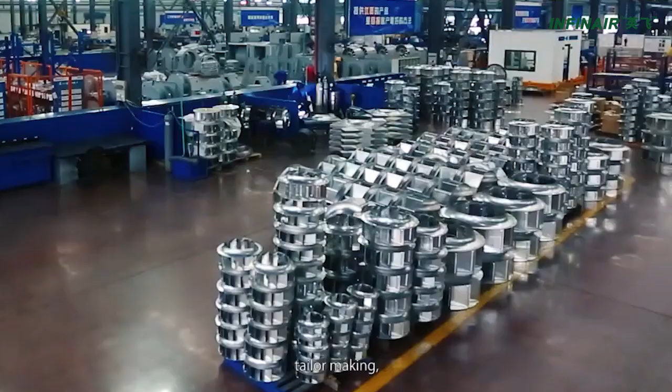Welcome to INFINAIR, integrated with R&D, tailor-making, manufacturing, and international serviceability. INFINAIR provides you complete, high-quality ventilation and industrial process air solutions.

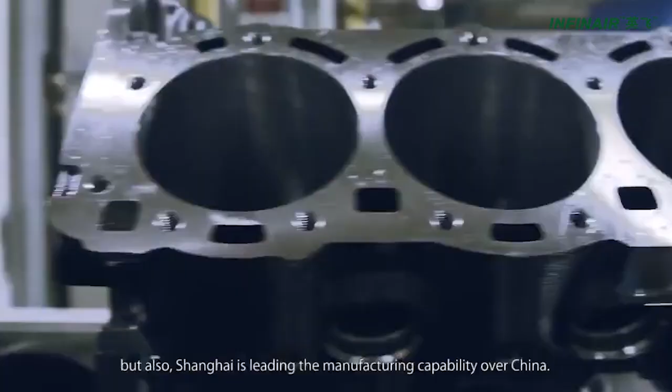Not only an international finance center and a business hub, Shanghai is also leading the manufacturing capability over China. Please follow us to our 33,000 square meter manufacturing center, right here in this dynamic and amazing global city.

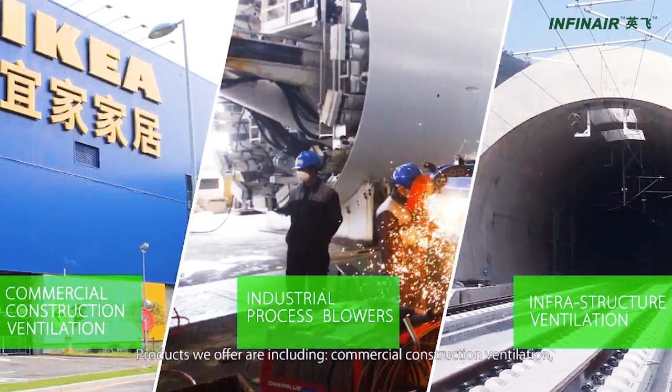Since 2003, INFINAIR started in a small workshop in Jiading, Shanghai. Now the modern R&D and manufacturing center is busy servicing customers from all over the world. But the dream of INFINAIR—extraordinary experience of customers and happy life of family members—has never changed.

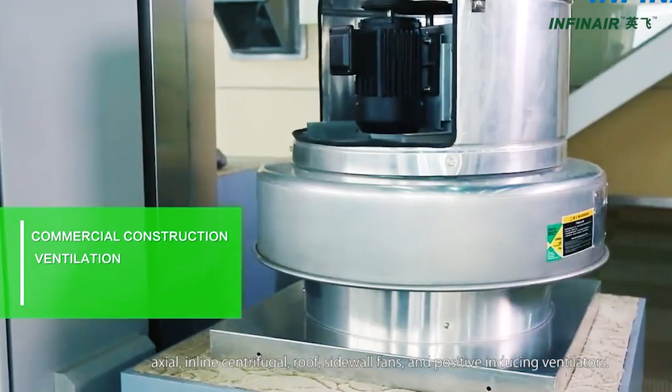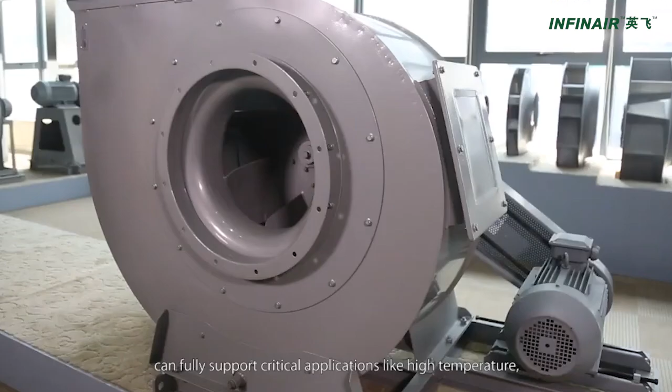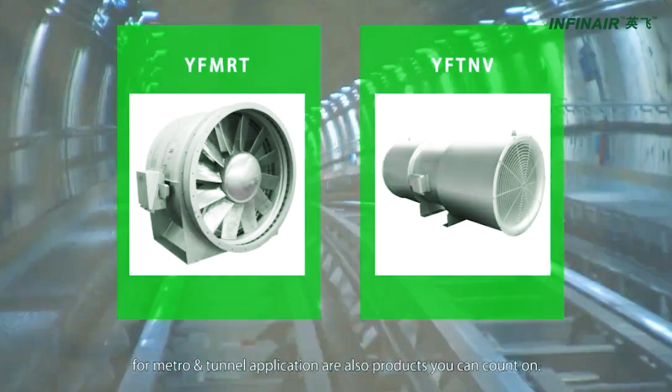Products we offer include commercial construction ventilation, industrial process blowers, and infrastructure ventilation. The commercial construction fans include axial, inline centrifugal, roof, sidewall fans, and positive inducing ventilators. The industrial process blowers we offer can fully support critical applications like high temperature, high pressure, explosive, and corrosive conditions. Reliable and economic ventilation solutions for metro and tunnel applications are also products you can count on.

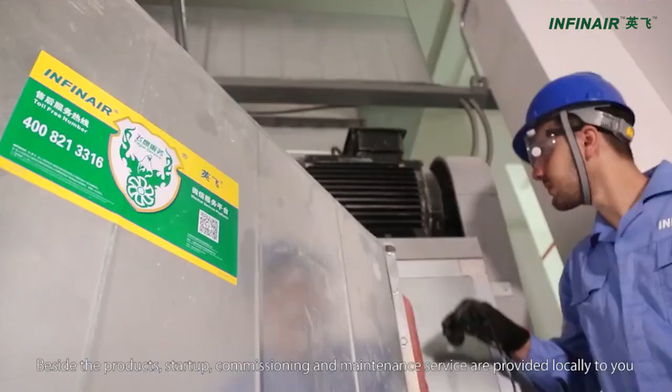Beside the products, startup, commissioning, and maintenance service are provided locally to you through our international partners in your country. We call it Eagle Service, which means right to the point, quickly.

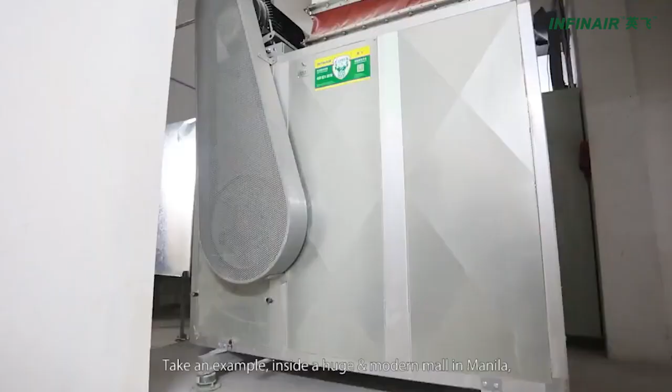INFINAIR Control Solution provides fan control cabinet design, manufacturing, and integration of communication between the BA system and fans. For example, inside a huge modern mall in Manila, INFINAIR provided underground car park ventilation layout design, all positive inducing ventilators, and all related control cabinets. The system automatically controls CO contamination across the total 6 floors of the car park region.

Tailor-making is also something meaningful. R&D ability is the core of product reliability. The 50 engineers on our R&D team have prepared more than 30 wheel platforms. This means we can quickly tailor-make designs for you without costing too much.

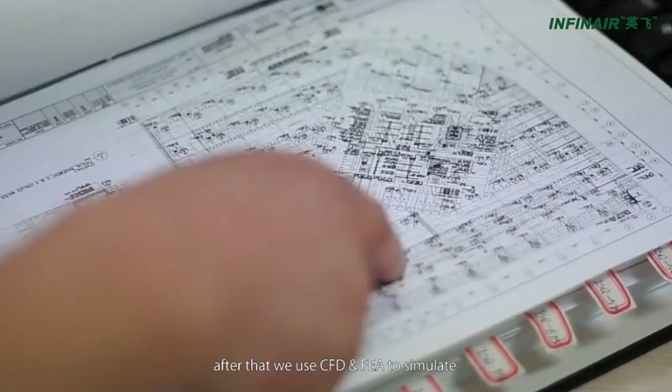The secret of how we achieve this is we choose one platform out of many readily available ones. After that, we use CFD and FEA to simulate until we find the performance you require. Maybe we need to modify blade height, blade numbers, or blade angle. Once it's done, we test the sample in the INFINAIR lab to verify everything is okay. The offer is ready.

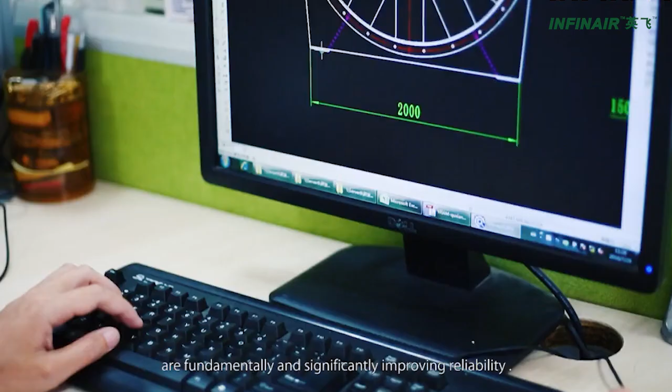Our CFD, FEA, and CAD technology fundamentally and significantly improve reliability. As an engineer, I'm very proud that our products are widely certified. Now I'm working on applying more and more international certifications, which we believe are essential for you.

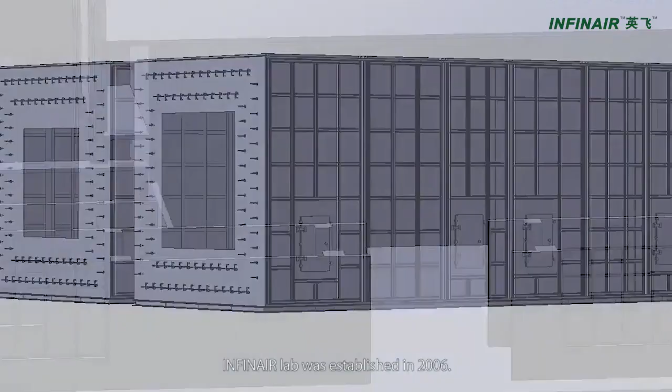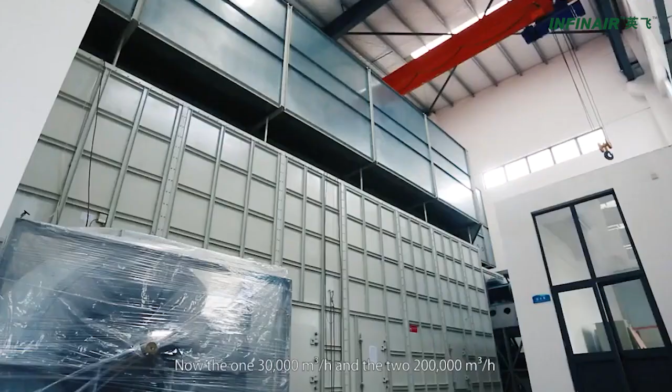INFINAIR Lab was established in 2006. Then in 2013, we reinvested over $2 million to renovate it. Now the one 30,000 cubic meters per hour and the two 200,000 cubic meters per hour super large-scale air chambers make the lab industrial-leading and world-class.

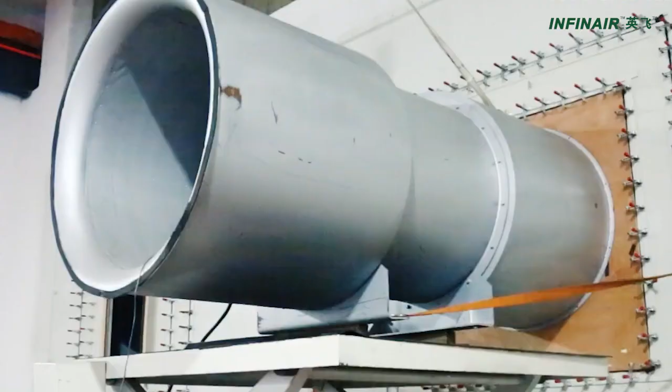INFINAIR Lab is the first lab in mainland China accredited by AMCA, and it is also listed as a nationally accredited testing laboratory by CNAS, according to ISO standard 17025 by Chinese authorities.

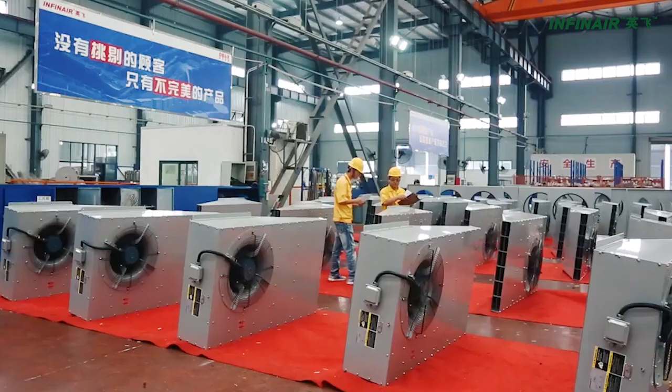Our product value proposition is reliable, convenient, and novel. Reliability is always our first priority. 5S, lean production, APQP methods, and Six Sigma systems—we practice these every day.

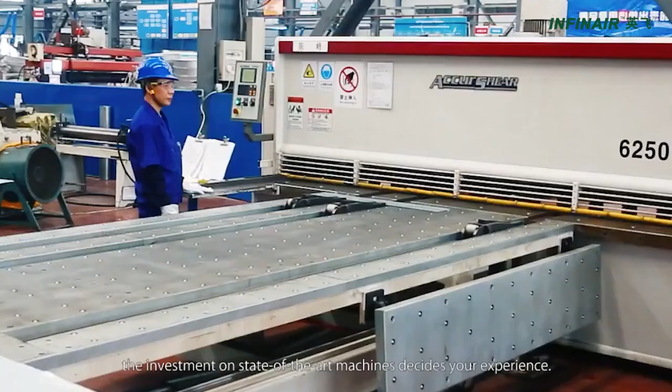Laser cutting, plasma cutting, robot welding, CNC lathe, CNC bending, CNC shearing—the investment in state-of-the-art machines decides your experience. Beside those, thousands of molds ensure the wheel platforms are right there to satisfy your needs. Such a large scale of product availability means convenient and quick solutions.

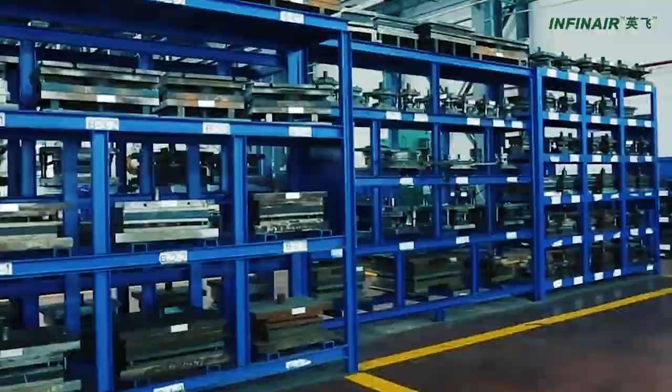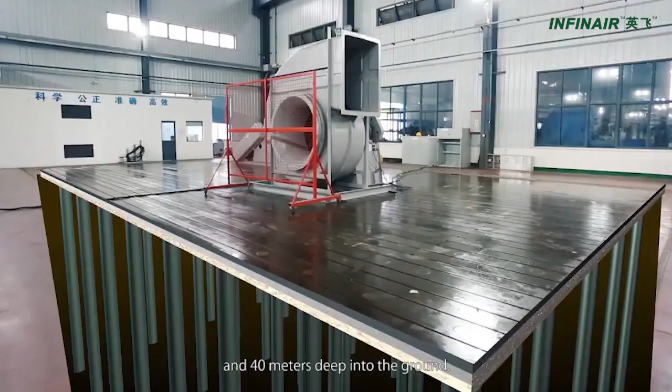Our vibration test bench is 18 meters long, 10 meters wide. It is surrounded by a vibration reduction groove, independent from the workshop foundation, and 40 meters deep into the ground. According to AMCA Standard 204, such a test bench is a must to achieve BV-3 grade, a vibration grade, which means good product.

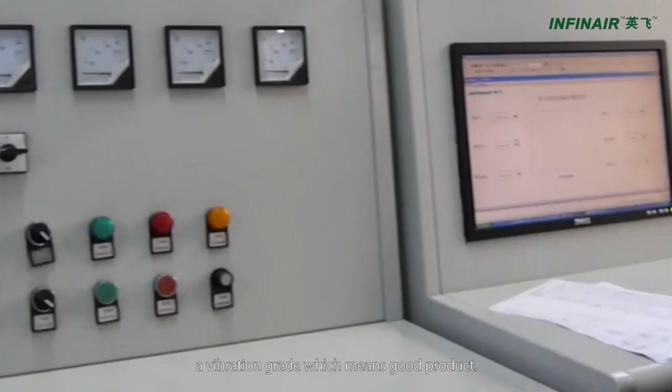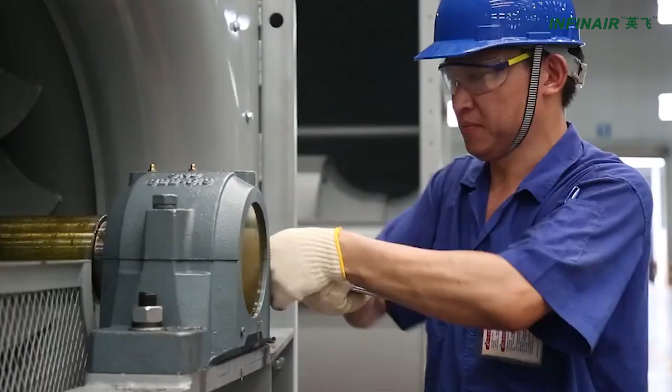Beside hardware, we believe the person, especially his spirit, is the key factor. Artisan spirit is something not just appreciated, but rewarded in the workshop.

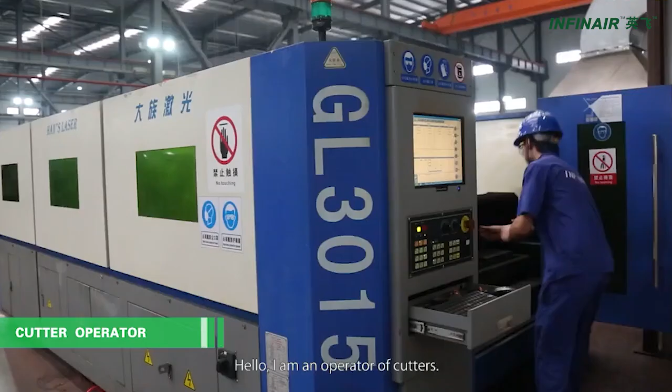Hello, I am an operator of cutters. The first thing I do every day is check and verify the gas pressure, electric current setting, size of nozzles, and the routing setup in the drawings. Those tiny details decide quality. Every night before I leave, I clean the machine carefully—that's a habit of everyone in my team. I proposed an improvement suggestion to the company, and I feel happy that they gave me a bonus for that.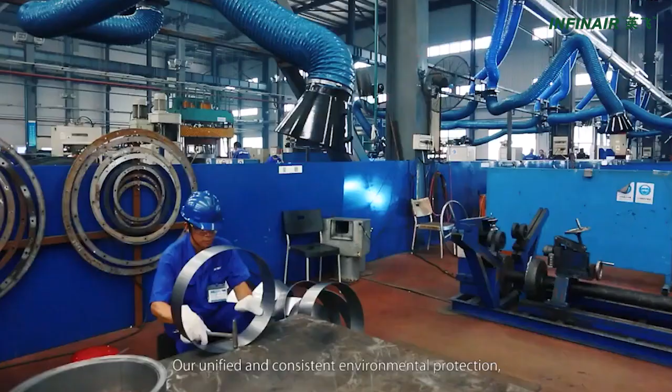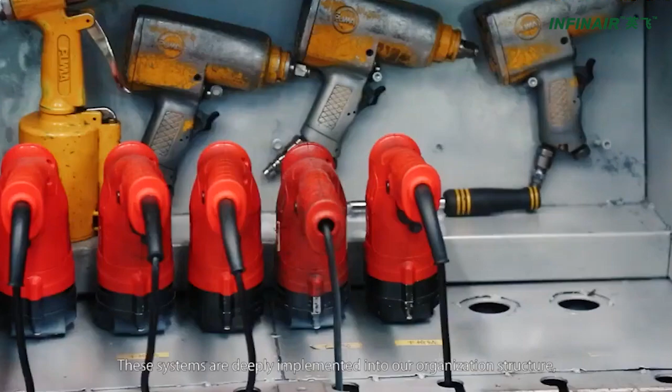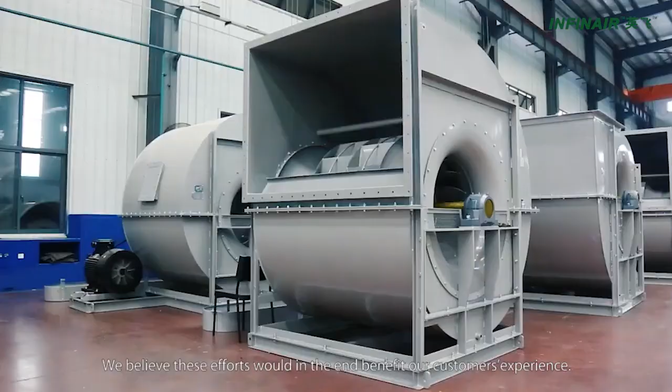INFINAIR is an ISO 9001, ISO 14001, and OHSAS 18001 certified company. Our unified and consistent environmental protection, occupational health, and safety management systems minimize risk of casualty accidents and occupational diseases, guarantee property safety, and improve work efficiency. These systems are deeply implemented into our organization structure, planning, activity, responsibility, working rules, procedures, and processes. We believe these efforts would in the end benefit our customers' experience.

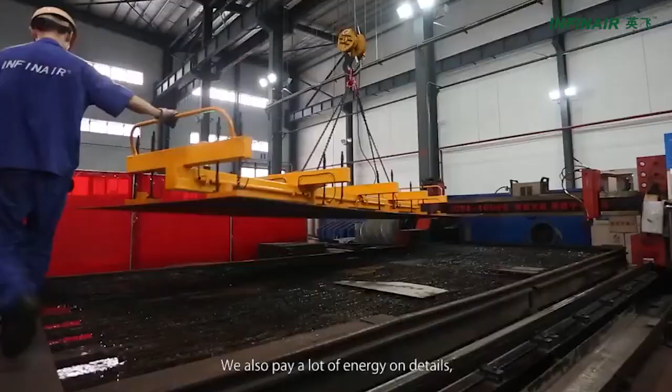We do care about your experience. That's why we focus on value: the R&D, product availability, delivery, noise, vibration, and efficiency. Those are the values. We also pay a lot of energy on details, because all you see, you hear, and you touch come from details.

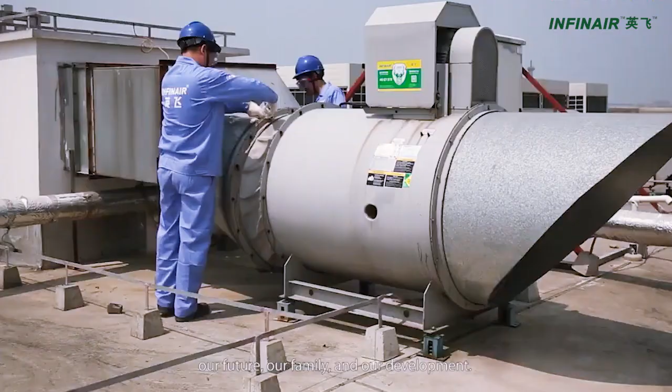How can we achieve that? I transformed the company into a platform—they are partners of INFINAIR's business. So your satisfaction is directly related to everyone, our future, our family, and our development. That's why we care. Your extraordinary experience is our goal.